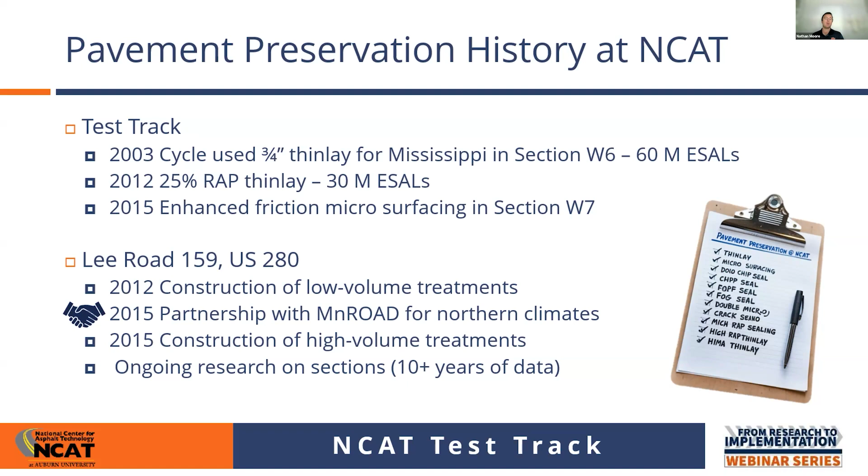But both of these, the 2012 low volume and the 2015 high volume research experiments, now have 10 plus years of data, and they're just incredible resources, not just for NCAT and our researchers, but our sponsors and the preservation community as a whole. It's been an excellent investment in research.

So we are continuing to monitor these in our next steps. We've got high volume and low volume, northern climates and southern climates, and all the combinations - high volume southern climate, high volume northern climate, low volume southern climate, and so on.

So it's an excellent cross section of different climates where preservation may be needed, different traffic volumes that may be expected, so that DOTs, county engineers, municipalities, or folks in industry can better select which treatments would best fit their needs. We've done quite a bit of thinlay treatments on the test track since that 2003 test section.

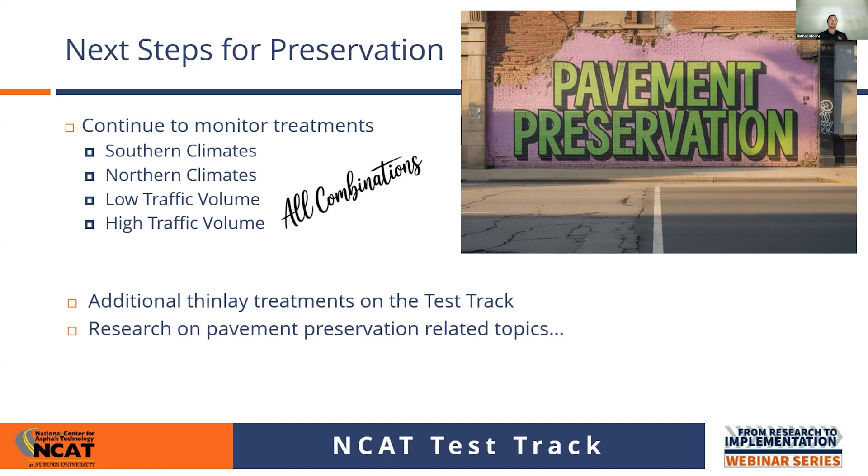But I don't really want to talk too much about that. I want to kick this over to Adriana and hear what she has to say specifically about research in an urban environment.

Good morning, everybody. I'm going to talk a little bit more about this topic, and specifically want to acknowledge the project where this information is coming from - a project funded by the Federal Highway Administration. We have a nice research team that includes ARA, NCAT, Chico State University, and the Transtec Group, all working together with the main objective of summarizing and synthesizing all of this information into a document.

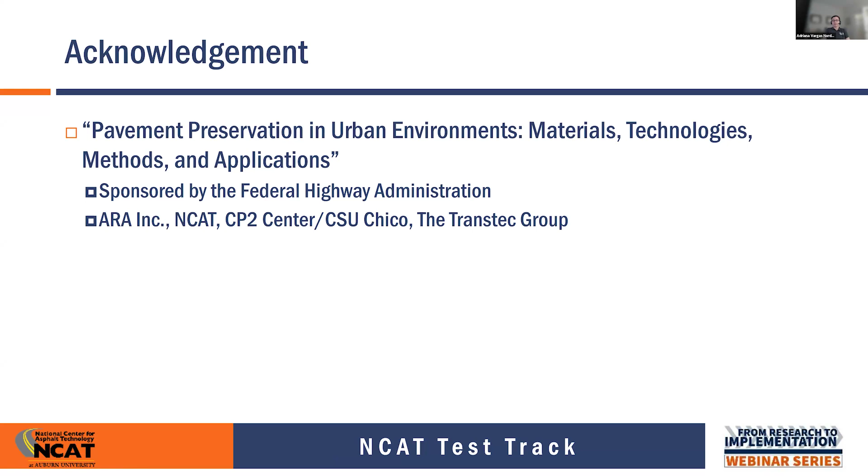A lot of this is not published, so we want to give guidance to agencies and industry on how to do this in an urban environment. The motivation for this is that an urban road or urban setting has elements that are not typically something you see on the open highway or in a rural environment. For example, curbs and gutters or sidewalks.

We have ADA ramps, signal loops, and a lot more density of utilities. These are elements that we have to work around and still construct a really good quality project when we do pavement preservation.

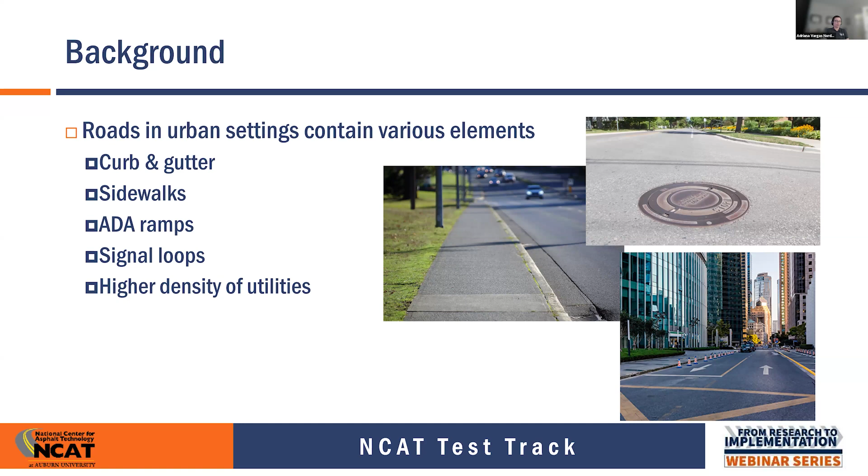So how to handle all of this is really what we wanted to address with this project, being able to give that guidance to agencies. In doing this, we know that we could be impacting vehicles, cyclists, pedestrians, just the general public. Specifically when we work in residential areas, it can become challenging.

Businesses - things that maybe were not as much of an issue in a different environment - just become really important when we do something in an urban setting. This is something we can face and plan for, but we have to know it will have a significant effect on our work zone duration.

Cost can also be impacted. There could be additional environmental considerations. So all of that is part of what we have to account for.

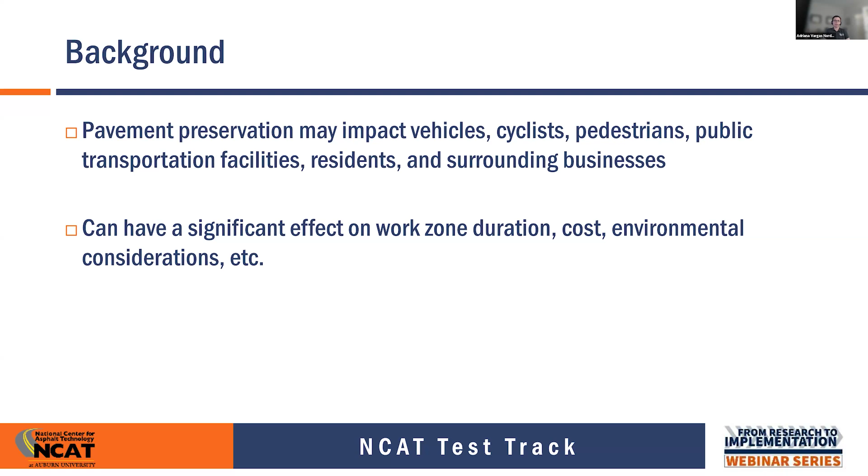As I mentioned before, the majority of this information is not really published. We really had to rely on interactions with different agencies, contractors, and practitioners. The main stakeholders we interacted with were the different regional pavement preservation partnerships.

We also went through the Committee on Pavement Preservation for TRB, the Pavement Preservation and Recycling Alliance as well, industry, FP2, and the Metropolitan Transportation Commission. So there's a lot of different folks from different perspectives who contributed information to this project. Overall, we did more than 20 interviews with some of these stakeholders.

And what we talked about - first of all, we wanted to discuss treatment. Is there anything they simply do not allow or don't do because of an urban environment? Is there a most effective treatment they use in urban areas? One of the most important things was what challenges they face when doing pavement preservation in that urban setting. Does that affect the selection process? What are the factors that come into play, and to what extent?

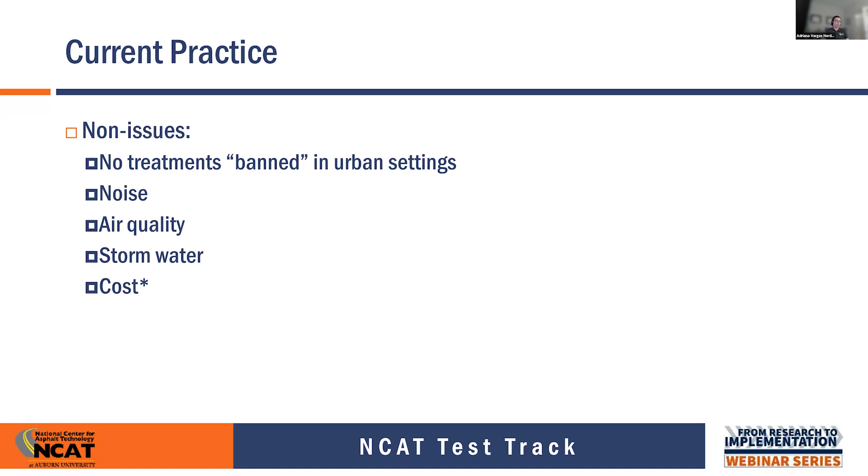If you can bundle projects and have a good mix of urban and rural, that can help offset some of the increase in cost. So that goes in there.

I just want to mention some of the notable findings. There's a lot of information here and not enough time to go over everything, but I did want to point out some of the highlights. First of all is treatment selection, using your standard process but also taking into account some special considerations.

As you would with any normal preservation project, you want to start doing a detailed condition evaluation, a condition survey - say using PCI or any other metric - accounting for the different types and severities of distresses in your roadway. Then maybe do some non-destructive testing to look at functional and structural performance, like deflections or roughness.

Once you've completed that and looked at your whole network, you can develop a list of preliminary candidates for pavement preservation, and look at the pavement preservation toolbox - the tools you have - to see which treatments match the condition of your pavements, so which treatments will meet your needs.

Then finally, look at those special considerations and see if there's anything you maybe shouldn't be doing because it's an urban environment - which option meets your needs better while working around these additional elements. So you want to incorporate things like cure time - if you need to open traffic back up quickly, you look for treatments that give you that quick cure time.

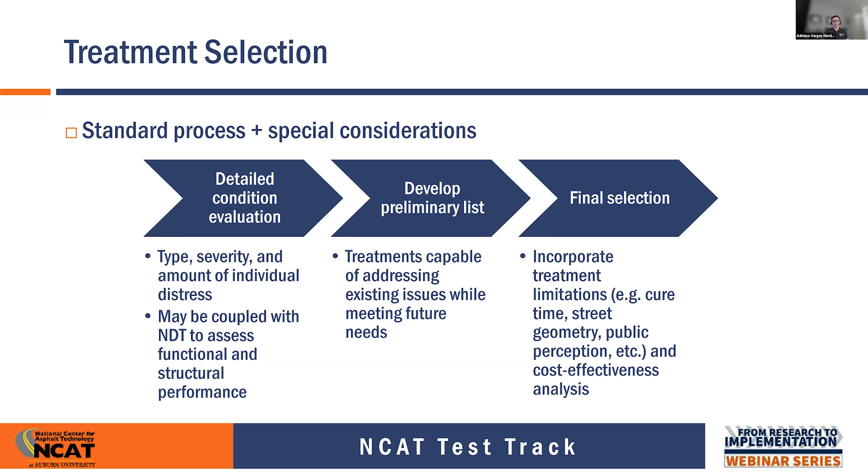Geometry - do you have enough space for your equipment to maneuver and do what you want to do? Public perception can be important, and I'll go over that in a bit. Once you look at all those special considerations along with your list of fixes and alternatives, what is the most cost-effective option here?

Among those special considerations, traffic conditions, for example - look at traffic volume, then consider cure time. How does your treatment affect your street closures? Do you need something that gets done pretty quickly? If you're in a high-speed area, then there are safety concerns - for example, if you do a fog seal, you'd expect a reduction in pavement friction initially that returns to normal with time.

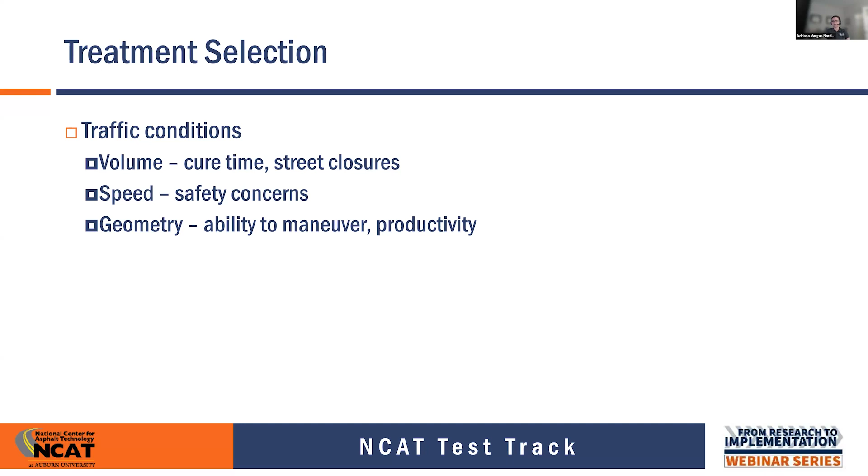If this is a concern, it's one of those special considerations that might make you move away from a certain treatment. I mentioned geometry, ability to maneuver, and productivity. This is a good example for the next slide: a cul-de-sac, which is a very common element in urban residential areas. If you're doing a cul-de-sac, you need equipment that can maneuver around the area.

This picture shows truck-mounted microsurfacing equipment versus continuous equipment, which is better for an open roadway setting. In a cul-de-sac, you need enough room to work, but then you'll have significant handwork, which can affect productivity. Also, traffic control matters—residents living in that cul-de-sac need to know what's happening so they're not trying to go in or out of their houses while work is occurring.

So communication is very important. Access to driveways, again, same consideration.

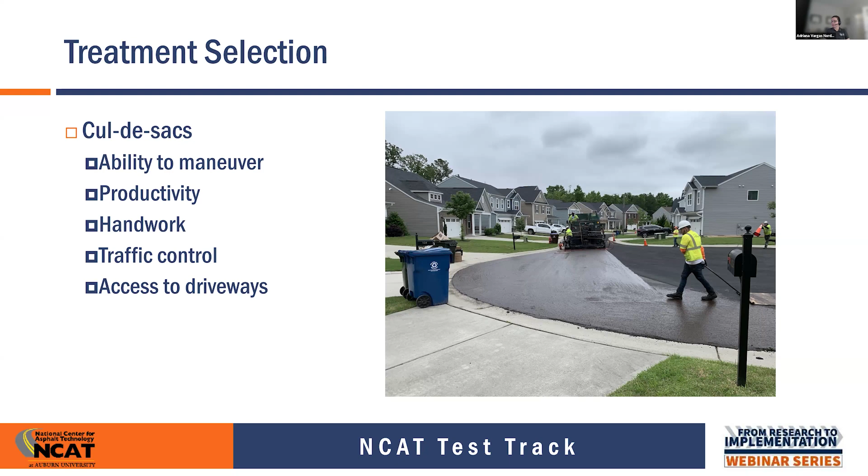For public perception and user satisfaction, treatments that result in higher texture could produce more noise, which isn't something you want in residential areas or areas with bike paths. Residents tend not to like that, so it's something to consider when making your selection. Aesthetics matter too, and this is an example with crack sealing.

We ran into several agencies that do crack sealing but don't leave that as their final surface treatment. They'll seal cracks and then come back with a fog seal, a chip seal, or microsurfacing or slurry. So it's not that they ban the treatment—they just work to combine it with something that works.

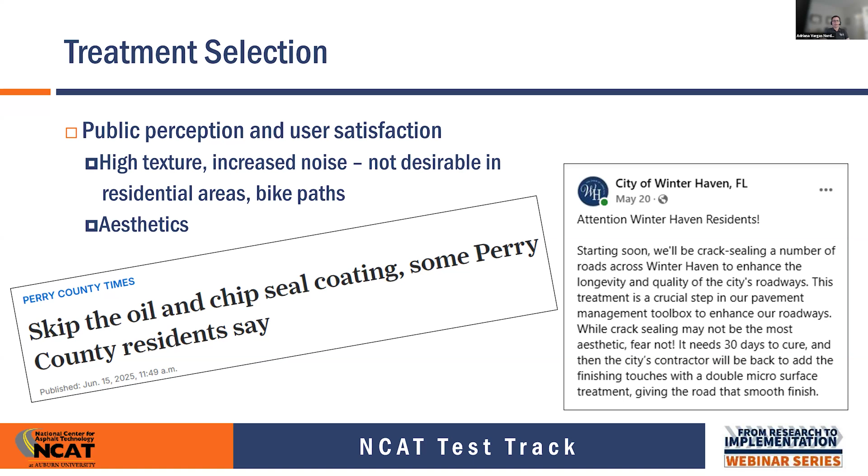Material selection should be done according to traffic and climate conditions. When we talk about aggregate, for chip seals or slurry surfacing systems, we'd use coarser aggregate for higher traffic applications. It's more durable but also gives more macro texture, which brings us back to being more noisy and maybe a bit rougher.

If we consider things like bicycle traffic, something we found in the literature is that keeping your mean profile depth to less than 2.5 millimeters helps mitigate those adverse effects from higher macrotexture.

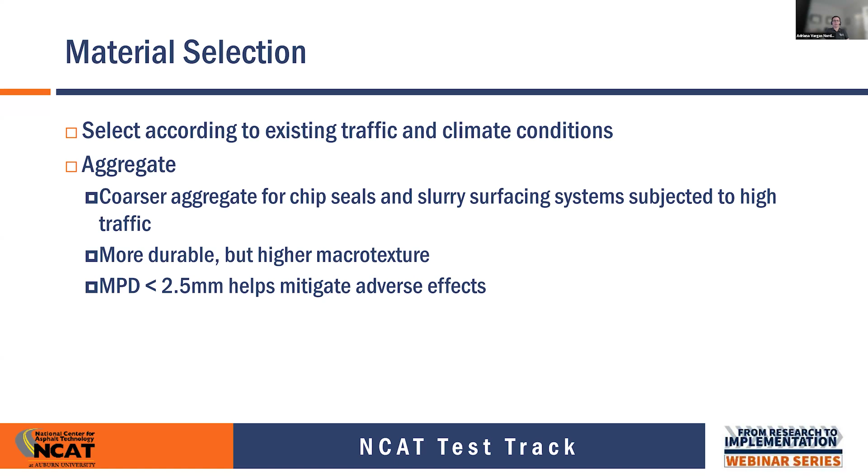If we're doing thin overlays, we can use any kind of gradation—dense, open, or gap graded. However, OGFC mixtures are not recommended in high shear areas such as a parking lot, intersection, or ramp terminals, or adjacent to curb and gutter, because of moisture accumulation.

On the other hand, open graded mixes, if we're in a noise sensitive area such as around a hospital or a school, can really help mitigate noise from pavement-tire interaction.

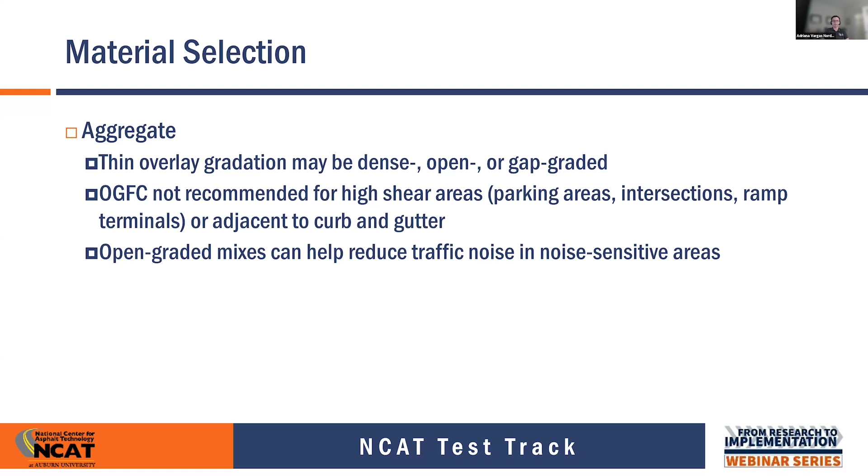Also, in urban areas where we have a RAP surplus, agencies could benefit from using that RAP as an aggregate source. This is a very common practice with asphalt concrete, but not so much with surface treatments. There's a big push right now toward using RAP in chip seals, microsurfacing, and slurry seals, but there's really not a lot of guidance yet. I know work is being done to establish guidelines, and it seems to be working successfully—it's just a matter of getting formal information out there.

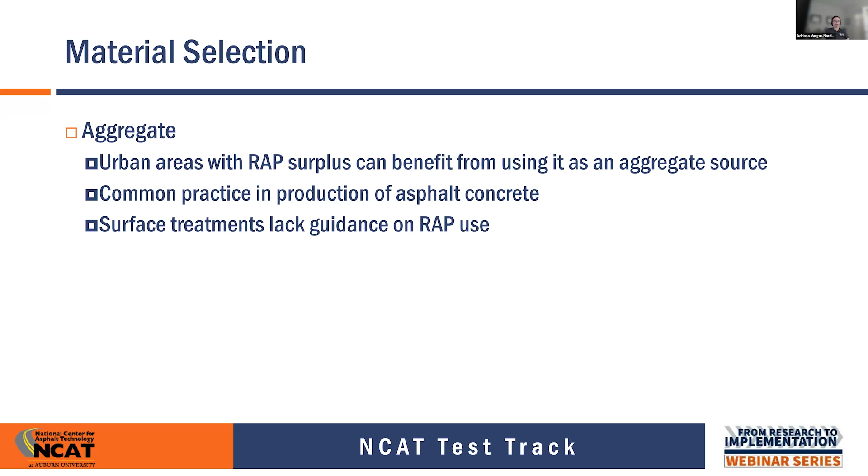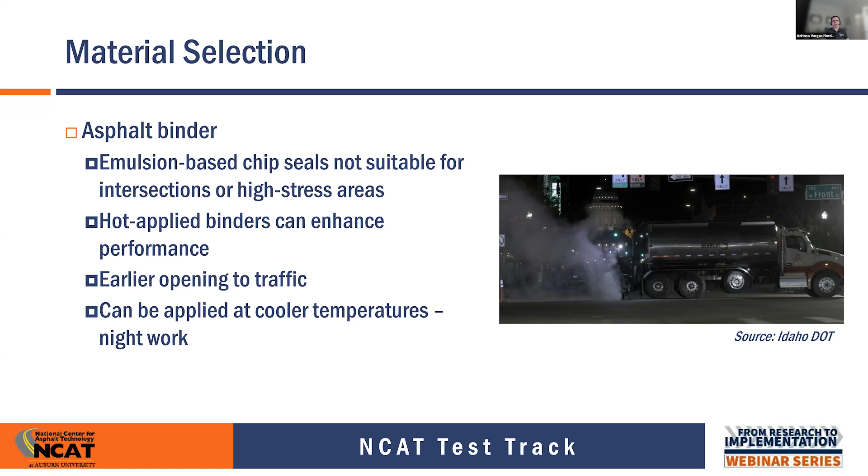In terms of asphalt binder, when we're talking emulsion treatments—our emulsion-based chip seals aren't really suitable for intersections or high stress areas, but hot applied binders can enhance performance and help if that's what we have. If we've selected a chip seal with those stress elements, hot applied binders might be better for that use. They also help open traffic earlier and can be applied at cooler temperatures, meaning we could do night work, which really isn't possible with emulsion-based chip seals.

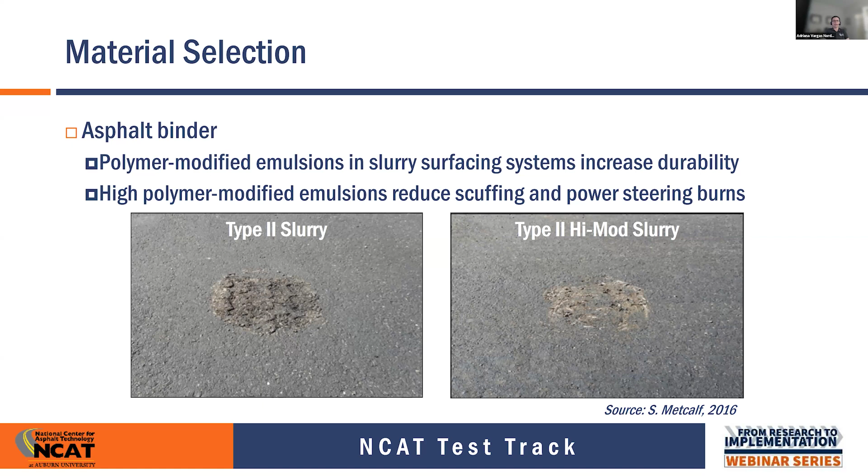Also, the use of polymer modified emulsions in slurry surfacing systems can help increase durability. This is especially important in areas susceptible to scuffing and power steering burns—we see a lot of that in cul-de-sacs, for example, where vehicles coming in and out of driveways cause some normal scuffing. Using highly modified emulsion really helps offset those adverse effects even more.

The use of polymer or rubber modified binders for thin overlays is good if we're in a high traffic, high stress area, or we have a lot of potential for reflective cracking. Those are also parts of the material selection process. Also using warm mix asphalt technologies, again, for thin overlays, can help improve workability and compaction.

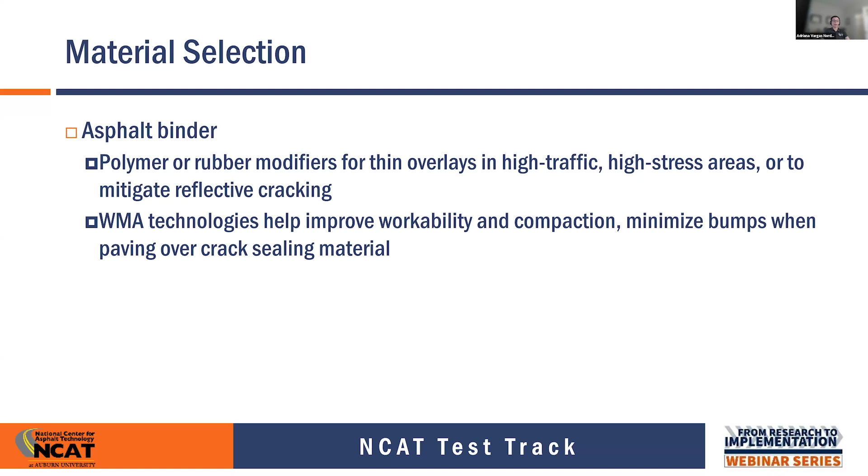If we have done preliminary crack sealing, that can also help minimize any bumps when paving over that material. For the schedule, if we're on a restricted schedule, that can increase the treatment cost up to 1.5 times. If we're obligated to do night work because that's the only time you can do it in an urban environment, then you may not be able to meet some of the weather requirements. That goes back to needing to select a treatment that I can do at night that can cure and get everything ready to open back up to traffic.

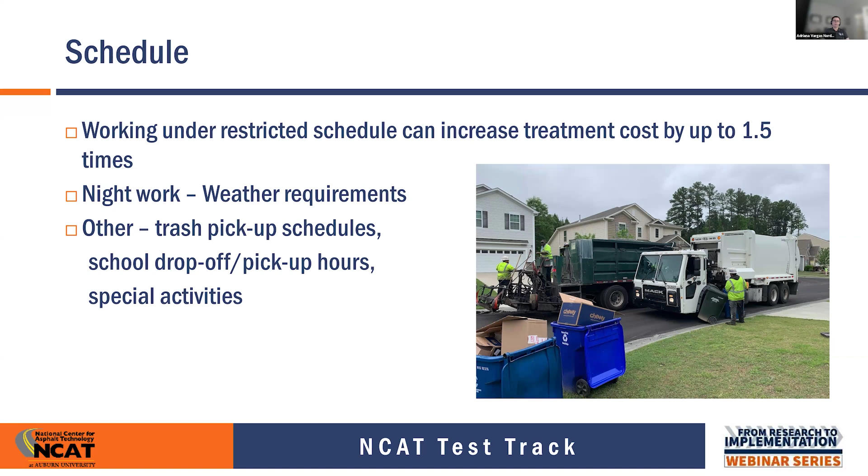Other things that are important: trash pickup schedules, school drop off and pickup hours, any special activities. This picture is from a project we visited in a residential area. It was not planned to be happening on the day that it did—there was a rain delay, and they had to go the next day, which happened to be garbage pickup day. You can see how the crews had to spend additional time moving trash cans and all of that. It just affects your productivity rates. Try to avoid that as much as possible.

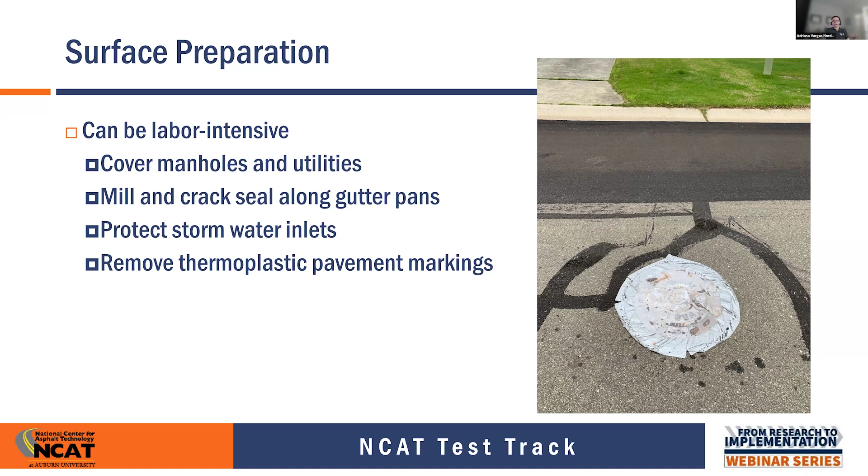Surface prepping can be labor intensive. You have to cover manholes, utilities, mill and crack seal on gutter pans, protect your stormwater inlets, and also remove thermoplastic pavement marking. Because you have a lot more density of all of those things in an urban environment, that is something that's going to affect your productivity rates.

Finally, I want to go into notifications. This is very critical—this is something that everybody mentioned, and it's very important. It lays the foundation for the success of your project. You want to make sure your users are informed throughout the project. First, because it builds confidence in what you're doing, so taxpayers know you're using those resources efficiently, but also informing specifically about the process and setting expectations and letting everyone know how they're going to be affected, to minimize delays and complaints.

Notifications happen throughout every stage of the project. When you're in the planning stages, you want to have that conversation with the community and explain what you're doing and why it's important, so you can be more general—talk about the current state of the network, what are the goals of your program, how you selected those projects, what's coming up, and how to get in contact with you. You can do that through town hall meetings, press releases, social media posts, for example.

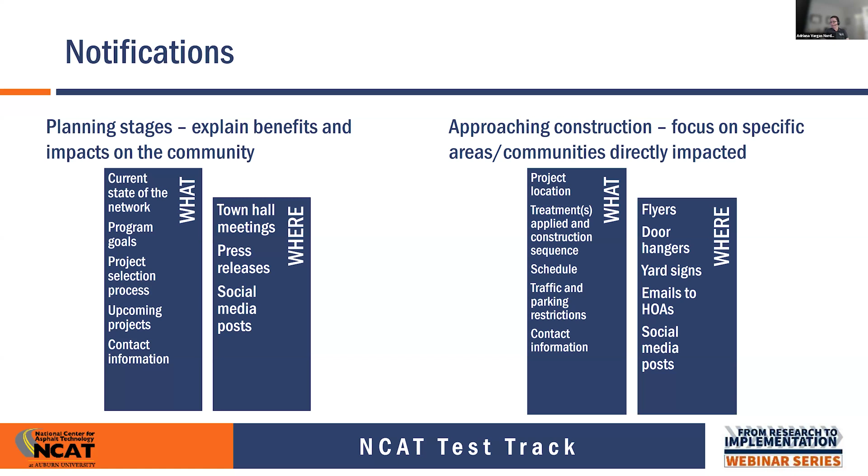As you're approaching the date of construction, you start to focus more on specific areas, targeting the communities that are going to be directly impacted. You want to let them know where you're working—project location, what treatments are going to be applied, and the construction sequence. Talk about the schedule, any traffic and parking restrictions, and give them contact information so they can reach you with questions. At this stage, you'll be placing flyers on businesses and residences, doing door hangers, yard signs, emailing HOAs, and continuing your social media posts.

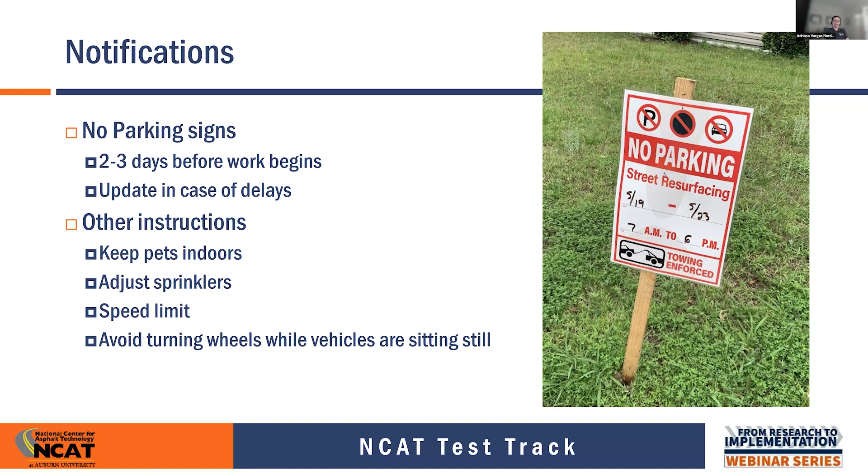As you're getting closer to the project, you can put up your no parking signs 2 to 3 days before work begins. If there's any delays, you have to update all that information and provide the public with instructions like keeping pets indoors or adjusting sprinkler schedules. If they have to drive slower, that's something they need to know, along with instructions like avoiding turning wheels while vehicles are sitting still.

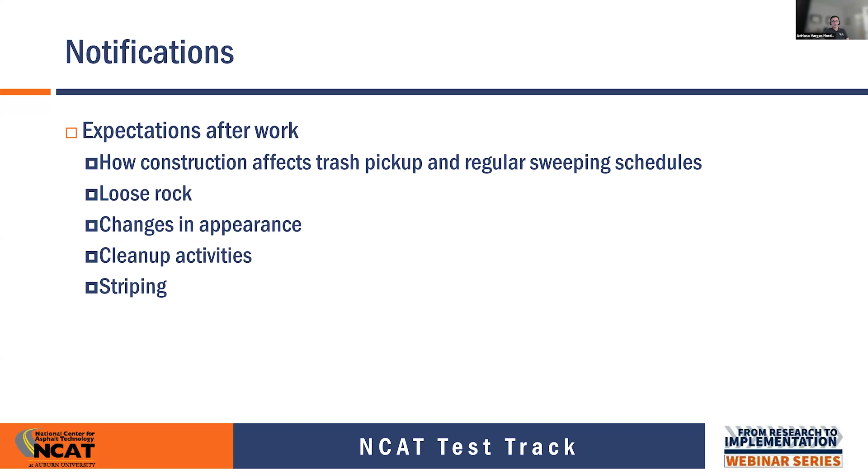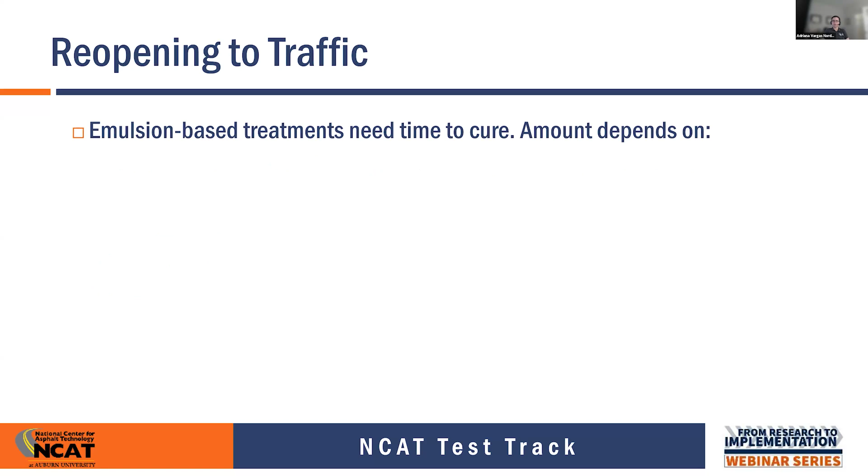Also have expectations set for after the work—how does that impact trash pickup and regular sweeping schedules? If there's going to be loose rock, let people know that's going to happen and when it will be cleaned up. If there are changes in the appearance of the pavement, or cleanup activities, or when the pavement's going to be restriped, all of that can be provided in flyers, posts, or other channels. Finally, reopening to traffic—if we're talking about emulsion-based treatments, they'll need time to cure, which may depend on treatment type, pavement surface conditions, and weather conditions.

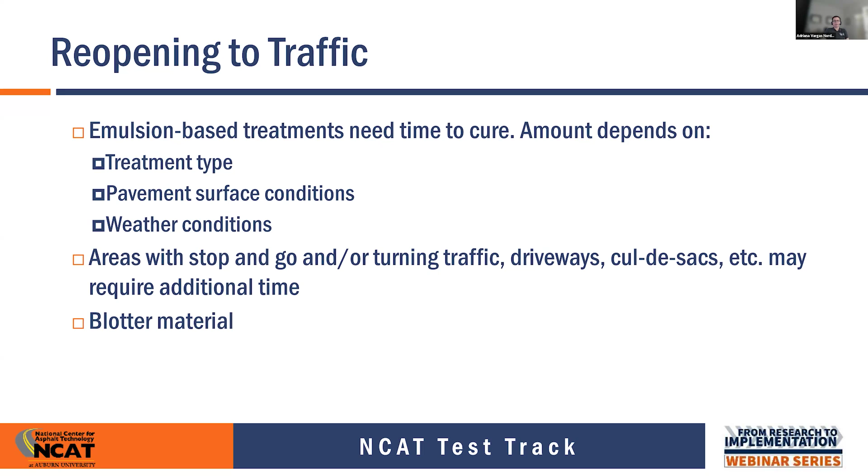If we have areas with stop and go or turning traffic, driveways, cul-de-sacs, all of that, that may require additional time as well. If there is a need for traffic to go before we're completely cured, you could use blotter material so that you don't damage the treatment. So those are some examples.

I'm not sure what's happening here.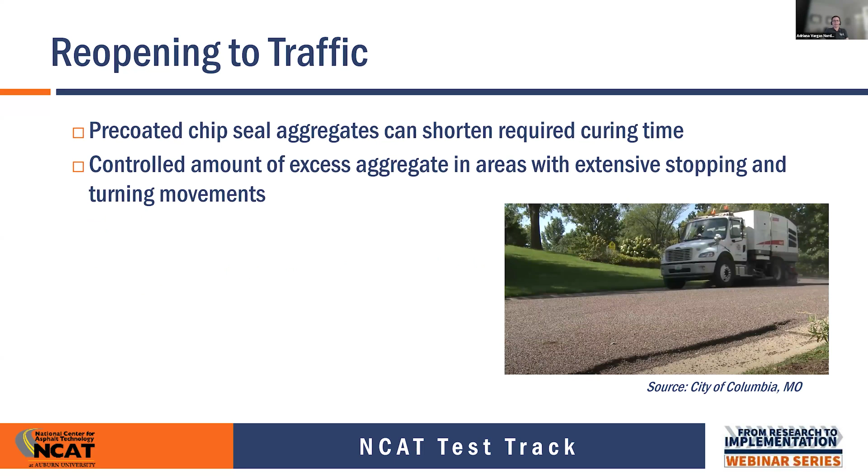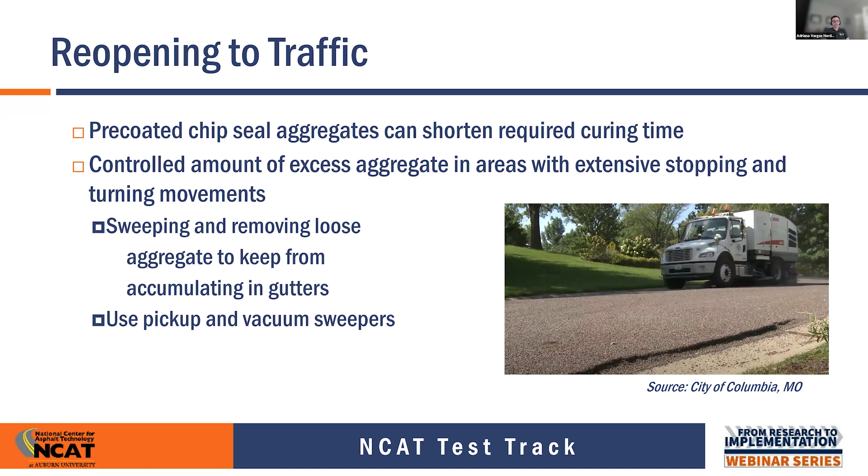Our pre-coated chip seal aggregates can help if we need quick curing time to open back up to traffic. We can also control the amount of excess aggregate in areas with extensive stopping and turning movements. If you're in an urban environment, you want a vacuum sweeper so that excess aggregate doesn't get pushed into the gutter pans.

So some final thoughts here. I know it's a lot of information. We will have a report summarizing everything. But it's important to see that we can conduct our pavement preservation treatments successfully in the urban environment. If there's a challenge or a problem, there's always a solution.

It's very important to communicate with the public and let them know what's happening. We saw some agencies use, for example, chip seals as one of their preferred treatments. But chip seals were too rough for the public, so they would come back with microsurfacing or a slurry as the final surface.

They had to really let the residents know this was a two-stage process: don't worry, first we're doing the chip seal, it will take a certain amount of time, then we'll come back and resurface. You can expect loose rock, and we'll have our work zone during the specified amount of time. When people understand this, it makes life easier for everybody.

So communication is really important throughout the whole process. And looking at what you want to achieve and what tools you have to do it is also very important. Great to hear that.

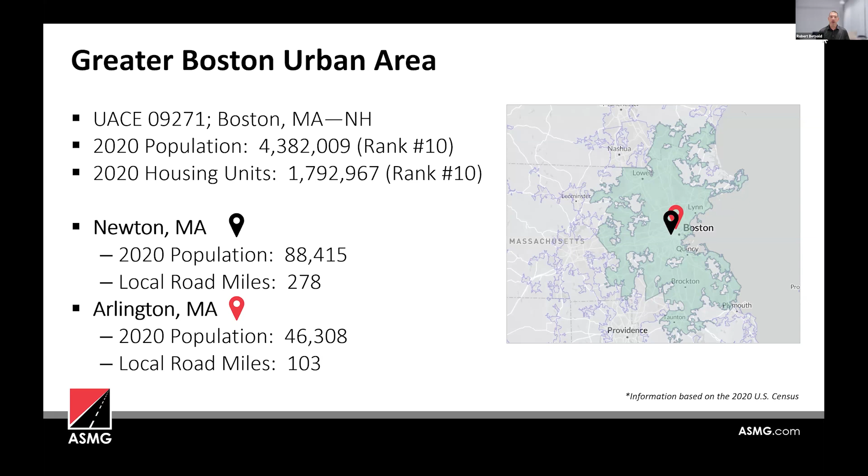Jumping in, I think a lot of this lines up with what Adriana hit well: the factors and challenges we face in an urban setting versus a rural setting or interstate. First, and I think the biggest one we all see, is traffic and mobility—taking traffic beyond just typical passenger vehicles and getting into public transit and multimodal with bike and pedestrian, and how we deal with the variability that comes with those, plus the congestion during work hours.

We have high congestion in the morning with people going to work and school, pickups and drop-offs. It may let up midday, then the afternoon can spread out longer. So you start looking at how that impacts work hours, and what we have to do from a traffic management and pedestrian management standpoint, and how that plays into the work. From there, moving into spatial constraints, where we have a high concentration of not just people, but activities.

And things that are happening where you've got businesses, emergency services, residential, and schools - and trash is a great one that a lot of people don't think of. It seems like no matter where you're working, what day you're working, it's always trash day. You can work in 5 towns in a week, a different town every day, and it always seems to be trash day in each of them. So coordinating all of that into very tight spaces comes into play.

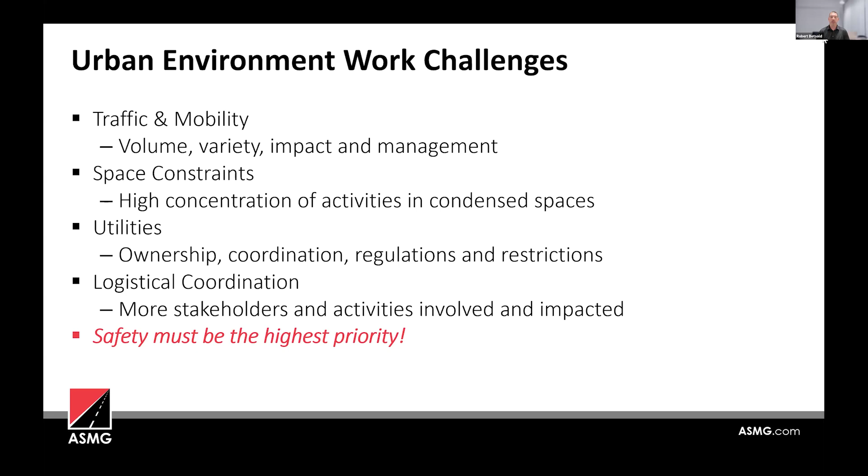So I mentioned I'm going to hit on 2 programs at a high level and use those as jumping off points to a lot of the work. I'll start with Arlington. Arlington is just north of the city, with a high concentration of neighborhoods - a lot of people that work in the city or around the city will live up there.

This is an interesting one because they were actually a community that had done a tremendous amount of chip seal work with conventional chip seal, with cutback asphalts, 20-plus years ago - one of the largest chip seal communities in the region. Then there were some changes on the materials being used, things with emulsions coming into play, and the aggregates used in conjunction with those. That led to issues around loose stone, broken windshields, stones in driveways and yards, and a lot of the issues and concerns that can come up sometimes with chip seals.

As a result of that, that ended their program. So for decades, chip seal was not an option, and the community really shifted towards what we call worst-first, where rehabilitation, repair, and overlays were the major portion of their program, with some usage of crack seal. They started to look at some preservation with a paved process using the bonded wearing course in 2015, initially in neighborhoods - I'll get to that in a moment.

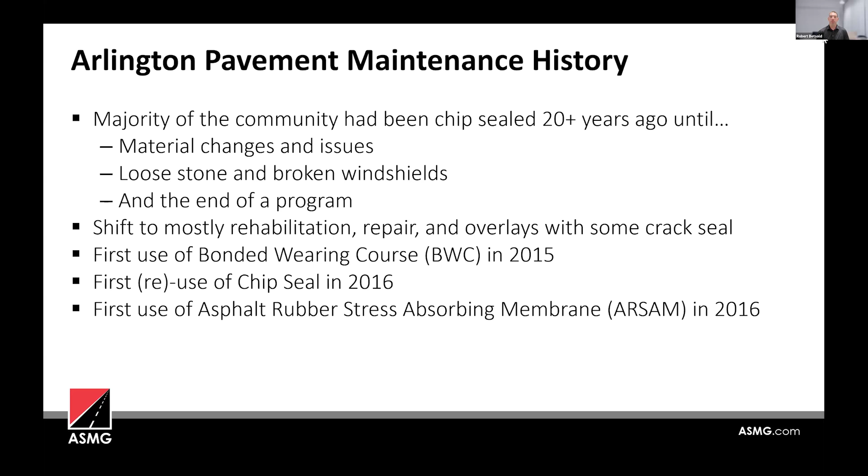That created the opportunity for them to springboard their program forward to where they now have an annual program over a 3 to 5 year period. They shifted a lot of their maintenance dollars from that worst-first approach into a preservation focus. With some of the lessons learned, they focused on the bonded wearing course application on their arterials and main drags, the higher volume and higher traffic roadways, and then consolidated that hot-applied chip seal into their neighborhoods, coordinated working neighborhood to neighborhood to neighborhood, going in from a mobilization standpoint one neighborhood at a time and working our way through. The biggest part, true for both case studies, has been the continuous modifications and changes to the program.

And the feedback, what we'll call the feedback loop. Right from day one, there were a lot of lessons learned each year. So upfront coordination and meetings together with the agency and with industry about what's working, what may not be, and areas for improvement, bringing all stakeholders to the table, where we have a lot of different stakeholders, both from departments within the community, the business community, and others.

Some of the examples in the Arlington program, as Adriana mentioned, in terms of communication to residents was huge - parking and making sure we had cars out of the way, and making sure sprinkler systems were turned off. That was a significant issue early on. In neighborhoods, we run into a lot of basketball hoops, portable basketball hoops in roads, or if someone's moving, making sure moving trucks aren't going to be there, or dumpsters - all of those things really emphasized the need for communication.

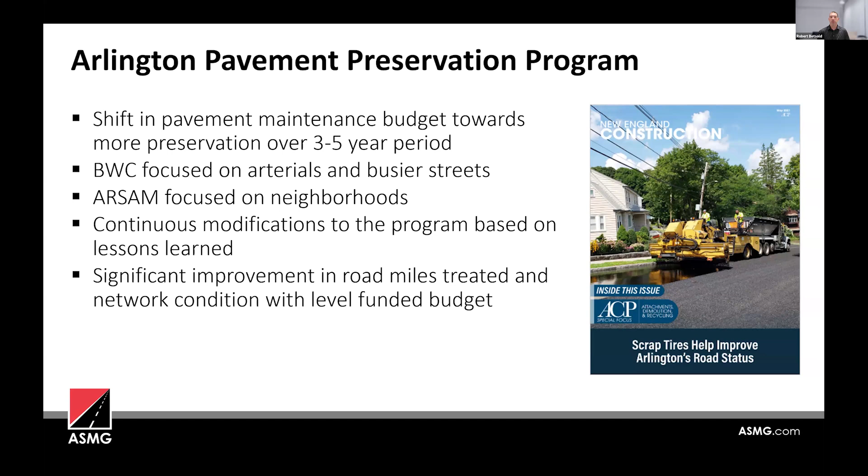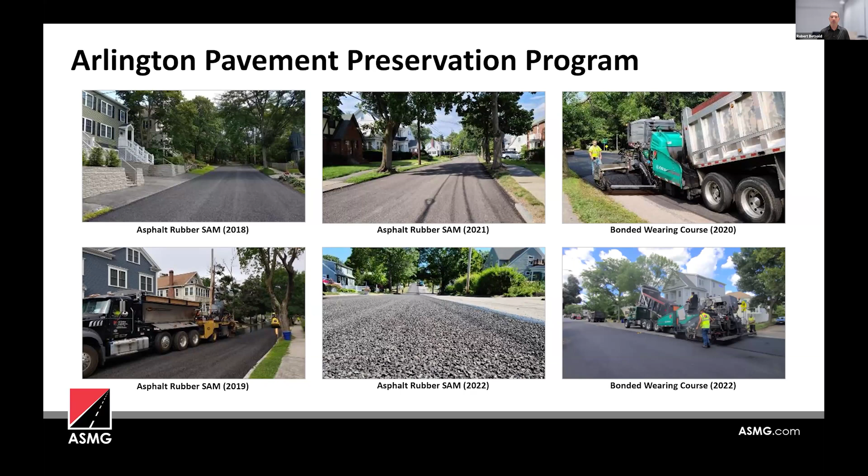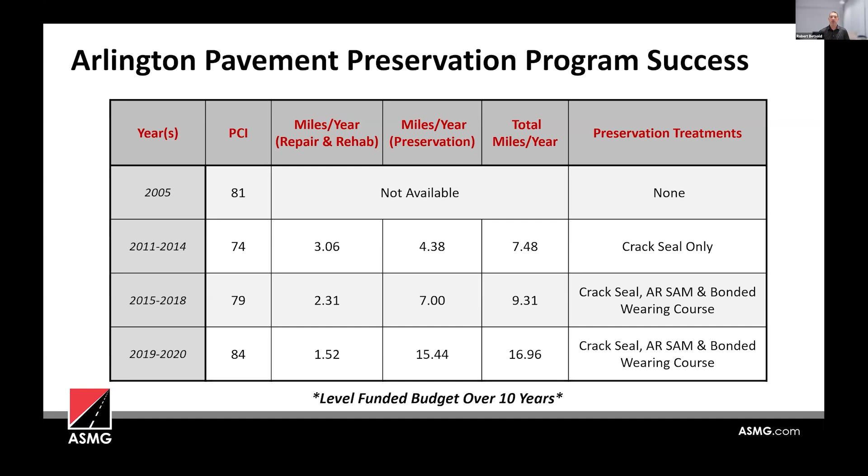Moving into another example on Newton. Newton is a little bit closer to the city and more urban, with much heavier traffic in the areas the program was working. Their program historically was similar - that kind of rehab, repair, and overlay approach with some crack seal.

In 2017, they did a survey of all their residents about what the prioritization was and what residents wanted to see funding going towards. The roadways were ranked number 2 overall, and the schools were number 1. Based upon that, they surveyed their road network and started to come up with a plan for not only how to increase funding and dedicate more funds to the roadways, but realizing that just putting more money towards it wasn't the solution - they also needed to find ways to more effectively spend those dollars, looking at alternative treatments and trying to keep good roads good.

So they took the opportunity over a 3-year span to really try almost all of the tools in the toolbox, and look at what was going to work for them, for the roadways that they had, and what was going to be the most effective.

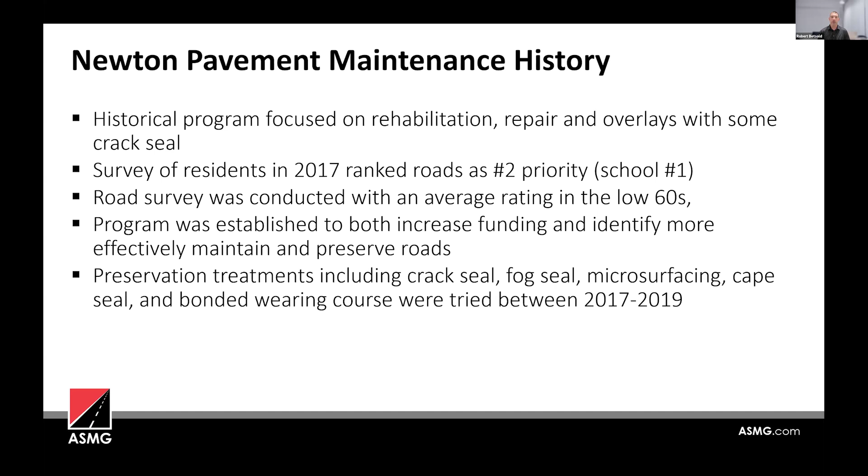I think this was a great approach for them to explore and see what was out there, and how it would perform, how it would fit within their network and their roadways. And again, go to that feedback loop. It's really the key for any program: as you're trying things, be able to adjust and improve. So starting in 2018, they turned the bonded wearing course into the cornerstone of their pavement preservation program, which had started out as that preservation overlay. Based on that success, they looked at how they could utilize it in more opportunities.

That included a pretty unique application. They had around 10 miles of concrete roads in the city, facing an expensive challenge of rehabbing, repairing, or replacing them, ripping them out—very time consuming and costly. Through a combination of treatments, they developed a preservation approach for those concrete roads that has performed very well, with the bonded wearing course as the top course.

They've also used it in conjunction with their hot-in-place recycling program as the final surface. More recently, they've applied it to multimodal paths—an old carriageway right by City Hall that runs for several miles—using the treatment to minimize the overall profile impact and apply it to a large stretch of road with minimal impact and time constraints. Notably, as shown in that photo and article, they placed the concrete treatment on a section of the Boston Marathon route, coming out of Wellesley before the famous hills and intersecting with one of the very busy interstates through the city. So, applications in very demanding situations they've been able to utilize.

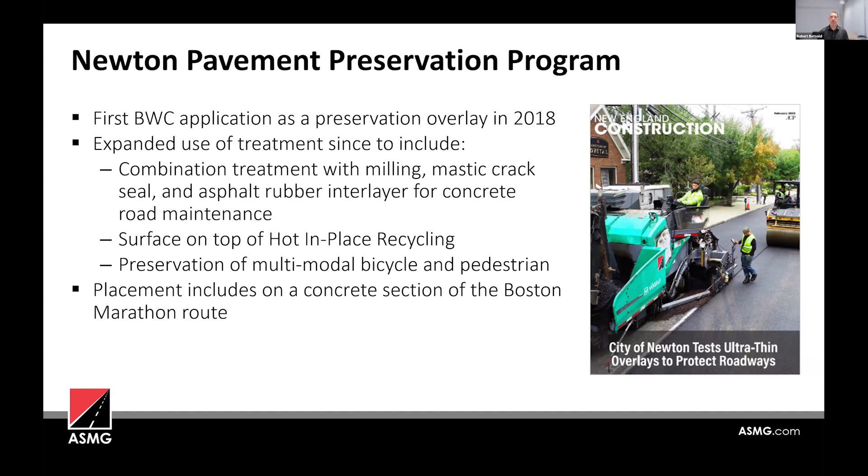Some photos there, a few things to highlight. The top left is a great example of a high concentration of activity in a very dense area—that application in 2019 was right in front of the busiest firehouse in the city. And as would be expected, not long after that photo was taken, actually less than a minute after, there was a full alarm fire, with all the fire trucks driving right over that application. Thanks to the quick application process and minimal impact, that was able to happen without impacting the emergency response. Similarly, we see a night application through downtown on the bottom left.

Moving to the center bottom photo, that's the concrete section of the marathon route. The right two photos show different applications: one is a surface over the hot-in-place, and then onto the multimodal carriageway. So Newton has really done a great job finding ways to utilize a treatment that's worked for them and use it in multiple applications, leveraging that success to be more effective and efficient going forward.

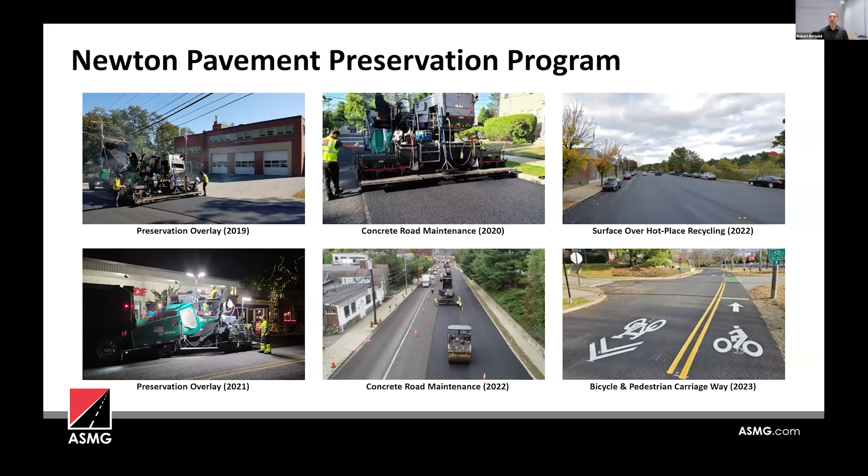One quick slide on that concrete program they developed, showing a before and after example. Without having to remove any of that material—just a surface mill—whereas before they were going in and completely removing and excavating all that concrete, getting into utilities and everything. This is a much quicker, more cost-effective process that has allowed them to address many more of those concrete roadways in a short period of time, utilizing a combination of different preservation treatments in a unique application.

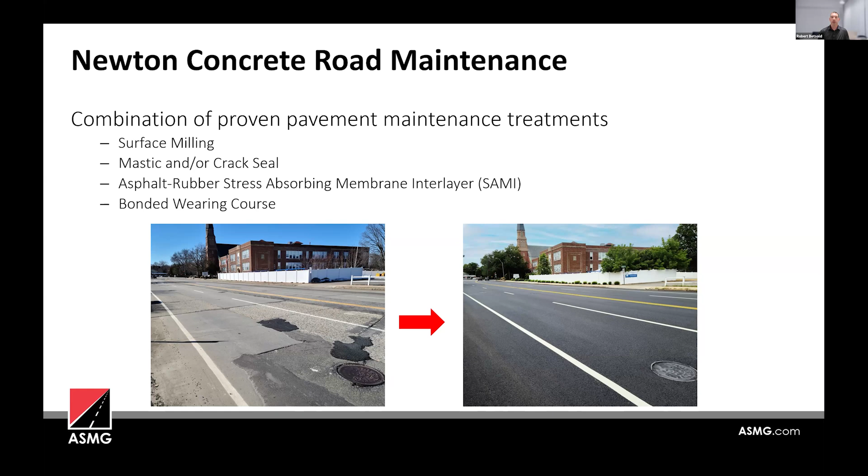I have a couple quick slides about the two treatments specifically mentioned, but keeping everyone's time in mind. So real quick, it's the asphalt rubber chip seal, a stress-absorbing membrane process. You can see what that process is versus the emulsion application—very similar in outward look, but material differences that give it the benefit of a quick return to traffic because of that immediate sweeping, along with higher application rates that allow for higher traffic volumes and more demanding situations.

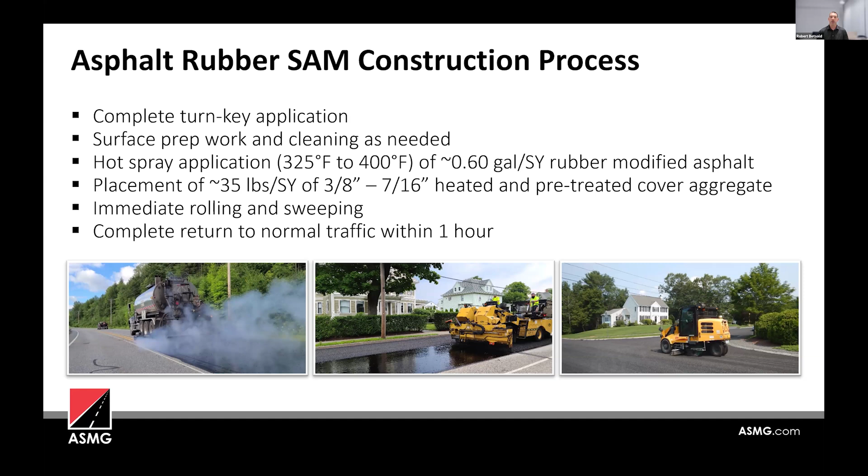When I talk about the material differences and application differences, the typical comparison in the Northeast is between a conventional emulsion chip seal versus a hot-applied asphalt rubber treatment. There's a significant difference in the type and quantity of materials, a higher cost, but a much more rugged material and higher performing application.

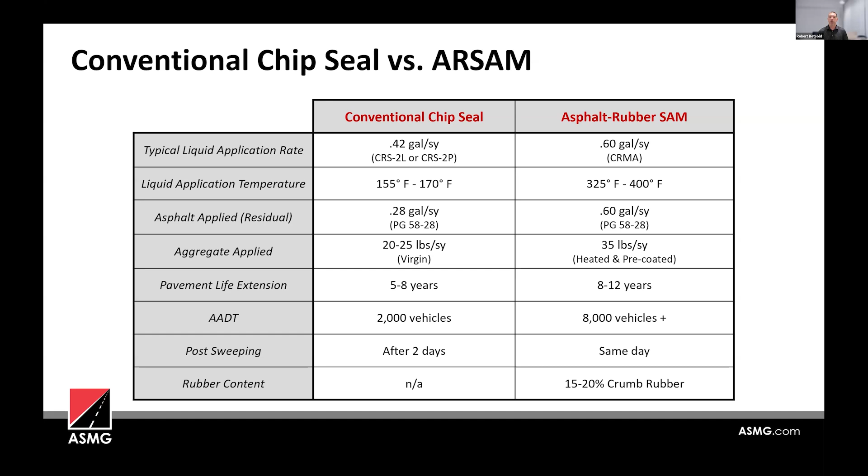We've seen in the Northeast a shift, especially in urban areas but really across the board, from emulsion applications over to hot-applied asphalt rubber, with one of the biggest reasons being same-day sweeping and minimizing the impact of loose stone.

Similarly, the bonded wearing course—just a brief overview of that application. It lends itself to the urban setting because of that quick process, the minimal impact to traffic, the minimal impact to curb reveal and structures, and many of the different items Adrian and I have mentioned.

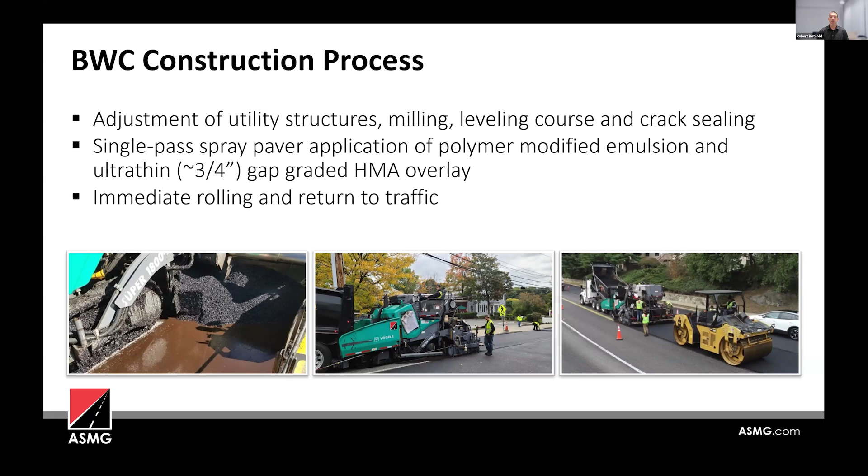But the traffic impact for cars going into that parking lot was a matter of a couple minutes, being able to allow traffic onto the surface very quickly, in and out, minimizing that impact is a huge benefit overall—something we've certainly seen have a major benefit in an urban setting.

Comparing the traditional thin overlay versus the bonded wearing course—what the materials are, what the applications are—when you see that thin application with a quick return to traffic, in a lot of cases where you have a good solid base and materials, being able to use that application provides an additional tool in the toolbox.

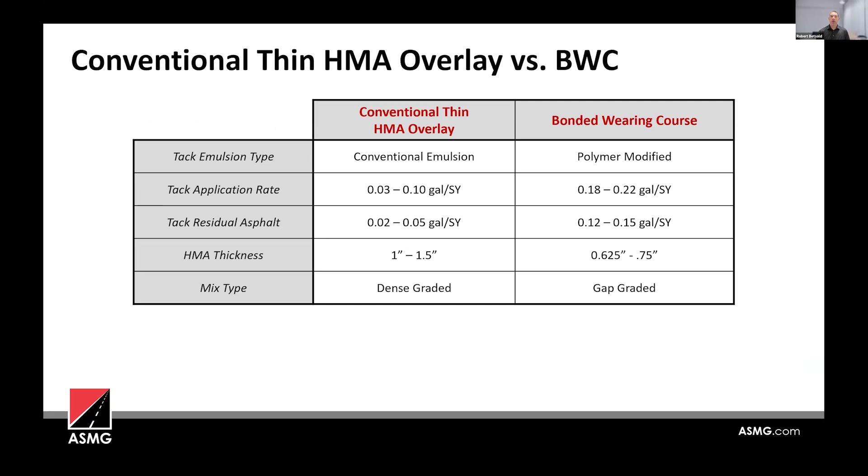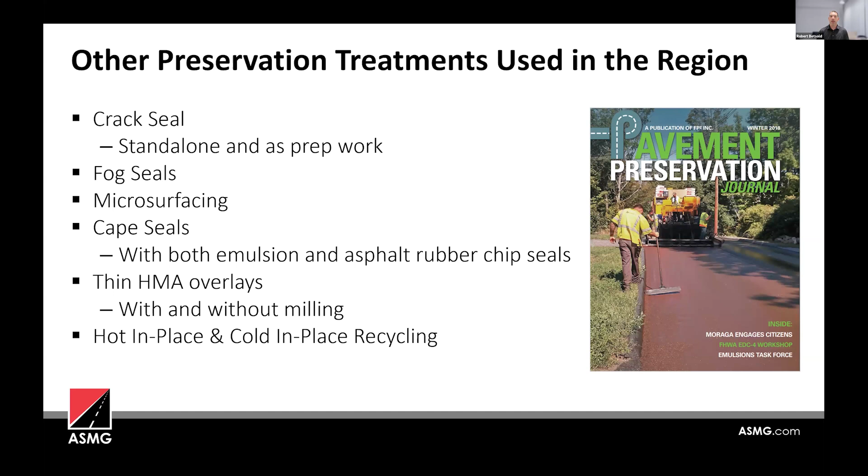How that's all happened, and wrapping things up, is a lot of the points Adriana mentioned. Right up front, like anything, project selection is key—that right treatment at the right road at the right time, nothing replaces that.

It's bringing in all the different factors of the urban area. Having a clearly defined scope, as we expand what's involved—more prep work, more responsibilities, expectations in that regard—is also key.

And that plays into the communication factor—first between the contractor, the agency, and other departments within the town, but then pushing out to the residents, the driving public, and everyone involved and potentially impacted, because there's so much greater impact from volume and high concentration of everything there.

Traffic control comes into play so much more—so much additional that's involved, being able to pivot on the fly. I really stress that urban paving, urban preservation, urban chip sealing, urban anything, it's not the same as working on a highway.

It's not the same as working in a rural area or on a state numbered route. Having experienced crews, the people doing it, the supervision and the traffic control—it is really critical to the overall phase, performance, and success of it.

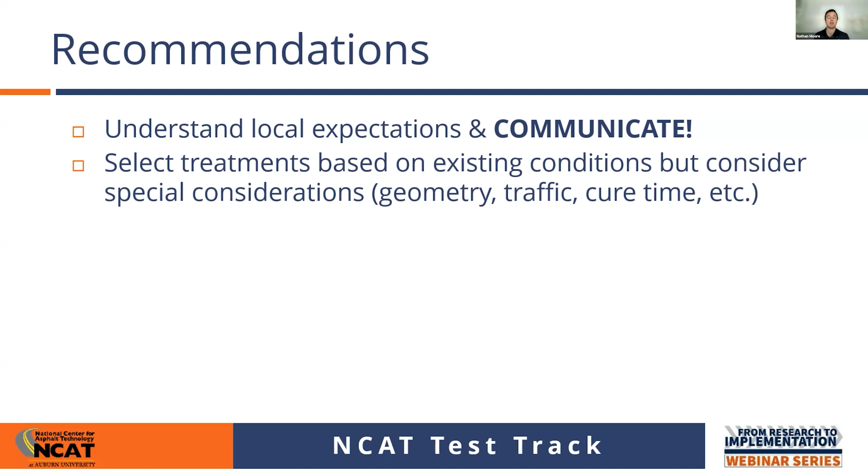I thought the emphasis on garbage trucks was really helpful, or even the example about treating a road in front of a fire station. You need something that cures rapidly in order to do that. Otherwise, there's a very high chance you'll be going back over it and doing it again.

Communicating with users was a very consistent theme throughout both of our presenters - to avoid issues with public services like school buses, trash trucks, fire services. Yard maintenance honestly took me by surprise - I never would have thought about asking residential folks to turn their sprinklers off to avoid issues with materials. That was a really good point, and it highlights a great example of the special considerations that come from working in urban environments.

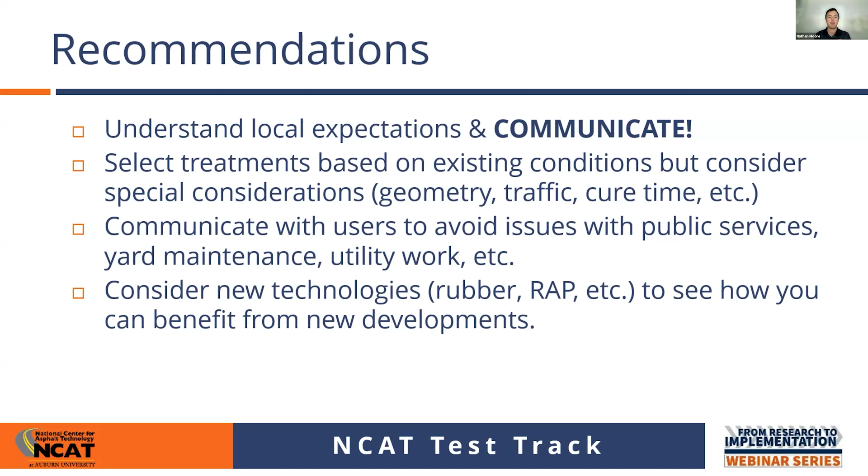Consider new technologies - we heard a little bit about asphalt rubber. Adriana talked about including RAP in preservation treatments, whether helping on the economic side or the performance side, or maybe both. See how you can benefit from new developments and new technologies.

And then finally, construction speed and curing time - speed seems to be essential in urban environments. Make sure you've got the appropriate material selected for the job, and notice ahead of time if you're going to need to get in and out of something quickly to avoid delays.

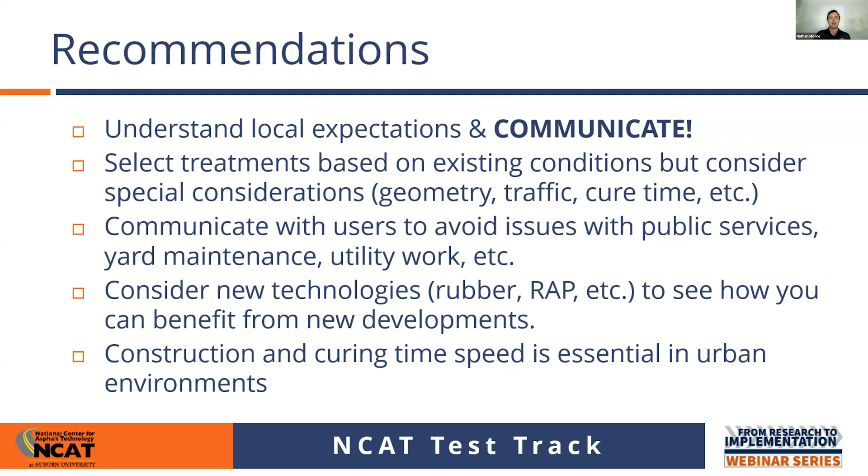So I do want to extend one more thank you to our speakers, Adriana and Bobby. And at this point, we'll turn it over for questions.

Great, thanks Nathan. A couple questions came in, and I've gathered a couple as well. One that I think is interesting that I want to bounce to both Adriana and Bobby: is there any sort of general guidelines or a table that can be used for curing times before we open traffic for the different preservation treatments?

I think with that one, as with everything, the answer is it depends - especially for emulsion-based treatments, they're highly dependent on environmental or weather conditions. But typically for these treatments we're talking a few hours, maybe 1 to 3 hours. It also depends on the level of traffic - if it's low volume traffic, you may be able to get away with it sooner rather than later. I don't know, Bobby, if you have anything else to add, but typically we're talking a few hours.

Yeah, I would echo that. I think emulsion treatments are really where that comes into significant play because of the curing versus thermoset. I've seen a fog seal set up in 15 minutes and be fine, and I've seen them take 3 hours where you're in a shaded area or otherwise. It even comes down to where if you've got tree canopy covering a small portion of the road, the rest may be cured but that canopied area may not. So certainly on emulsion, less of an issue on anything that's thermoset - that's again where we've seen a lot of the transition from emulsion to hot applied for that reason, specifically in urban settings.